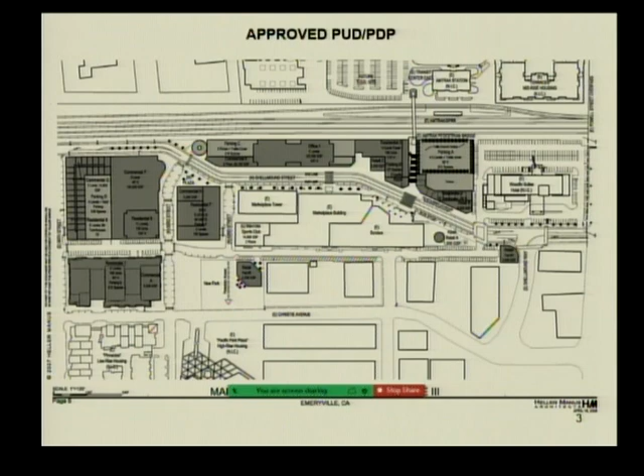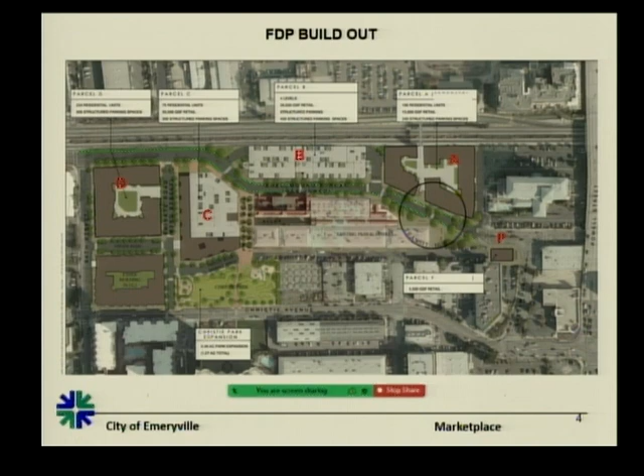Between 2015 and 2020, the Commission approved several FDPs, half of which have been built. Christie Park has been built, all the street work has been done. Parcel D, a residential building, has been built, as well as Parcel C, which consists of ground floor commercial and a wraparound of residential units.

The 3 parcels, A, B, and F, are the ones which are vacant. For A and B, there are existing entitlements. On parcel A, there's the entitlement for a residential building for 185 units, and on parcel B, there's an entitlement for office, lab, and parking that was approved in January 2020. No FDP approval yet occurs on parcel F, but that is being proposed at this time, as you will shortly see.

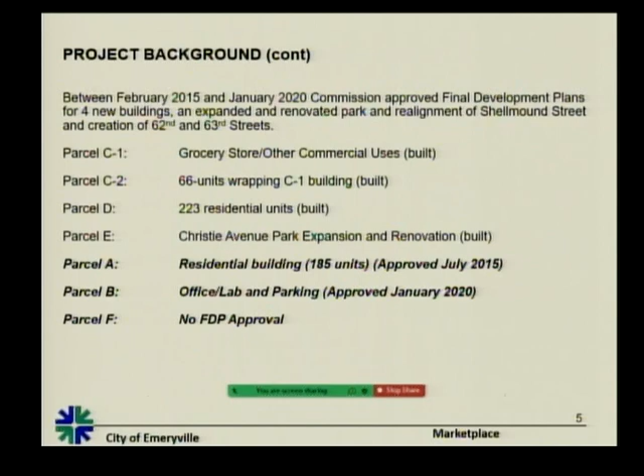In addition to the existing entitlements in parcels A and B, there is also a development agreement which the council approved back in December 2015, covering a variety of topics, including affordable housing. The section that pertains here is 7.1, which stipulates that parcel A include 18 affordable units. This section also states that unless the city finds compelling reasons to the contrary, the affordable units shall be dispersed throughout the development.

Here you see parcel A and B, as well as parcel F to your right. There are 3 buildings. The building to the north is the tallest, at 180 feet. The building in the middle is also R&D and is 60 feet. The parking structure is about 52 feet.

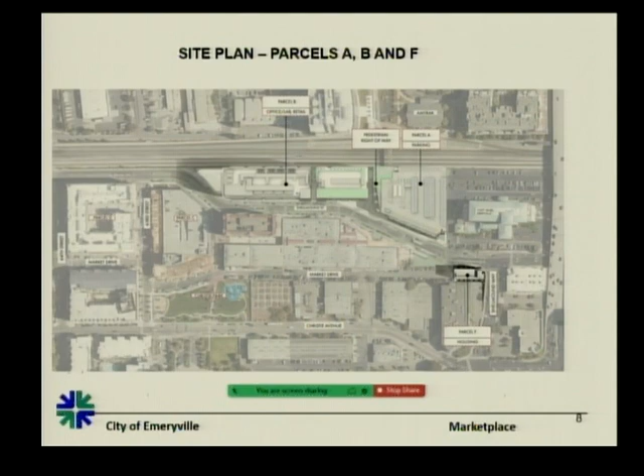This shows the ground floor of parcel A and B. On parcel B, you have 2 buildings. The ground floor on the middle building is retail, a little over 7,000 square feet. The ground floor on the taller building consists of conferencing amenities and back of house functions. Between the parking structure and the middle building is where the staircase connecting to the bridge comes down, with bike storage underneath the staircase, shown in more detail shortly.

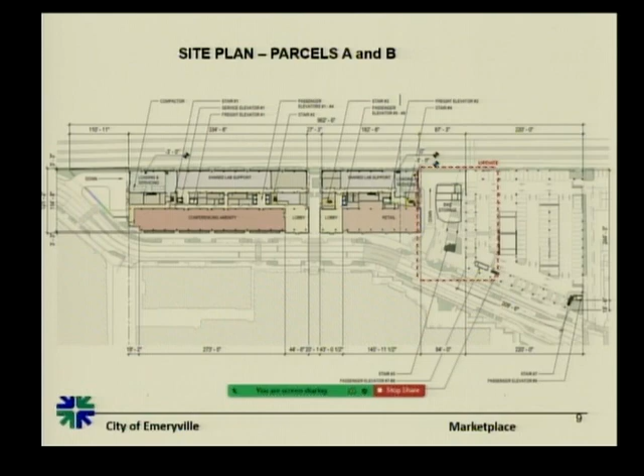The next 3 levels are basically floor plans for the R&D building and parking structure, changing on the 5th floor where the pedestrian connection occurs. At that level, the middle building's top level has a landscape roof and some mechanical equipment, and the parking structure has open air parking as well as solar panels.

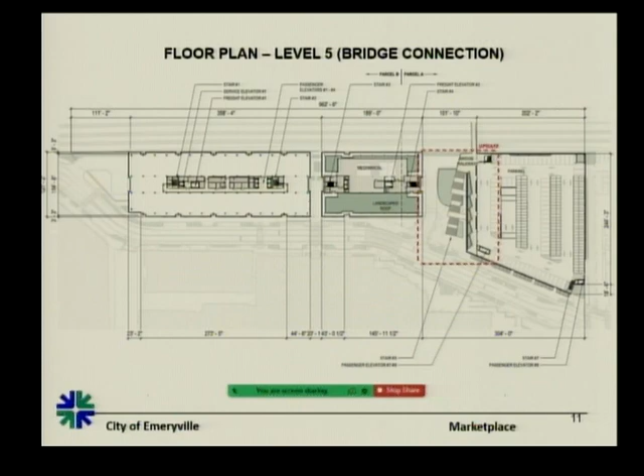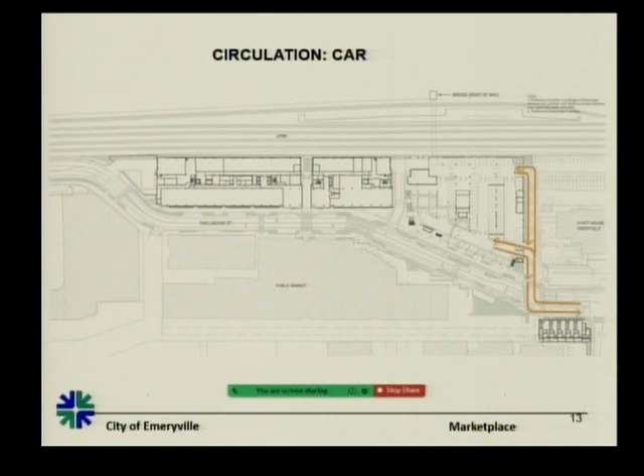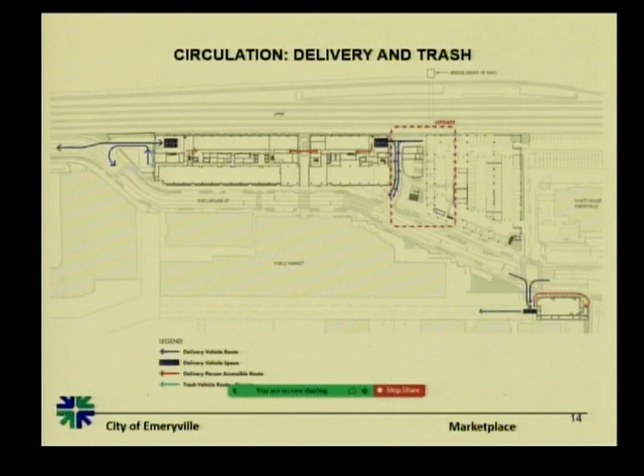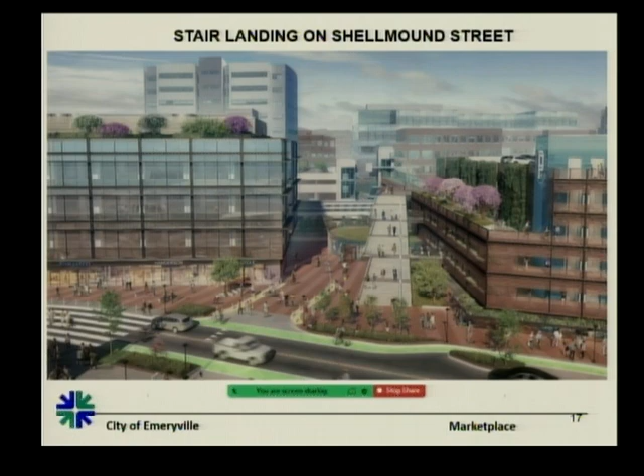And this is a view looking north. Next slide, please.

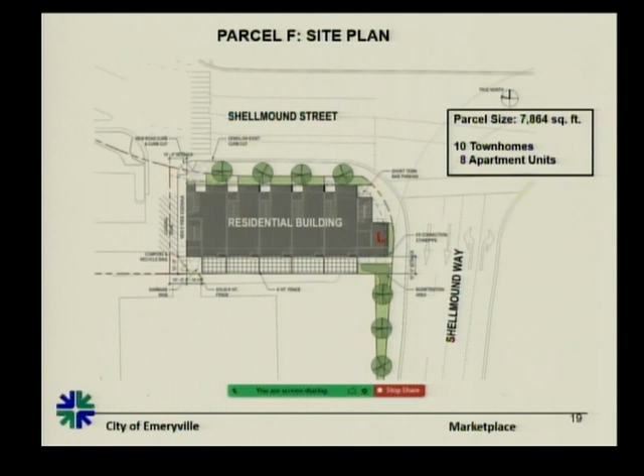On parcel F, this is a little under 8,000 square foot parcel. They are proposing 10 townhomes and 8 apartment units at the site.

Next slide, please. It reaches a height of 55 feet, and there are 4 levels of housing.

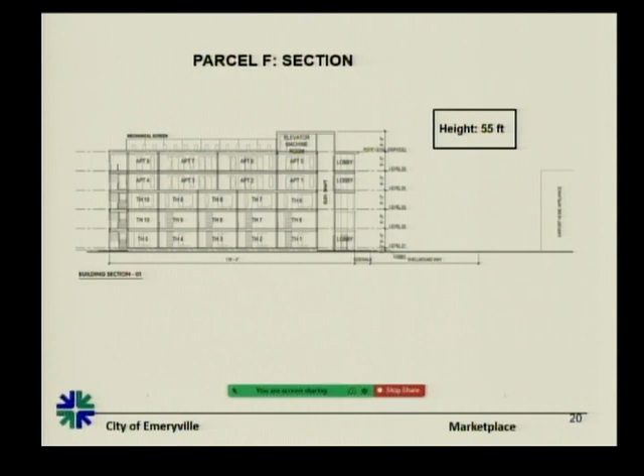Next slide, please. And these are the elevations, one showing the Shellmound Street elevation, and the other one the Shellmound Way elevation. Next slide, please.

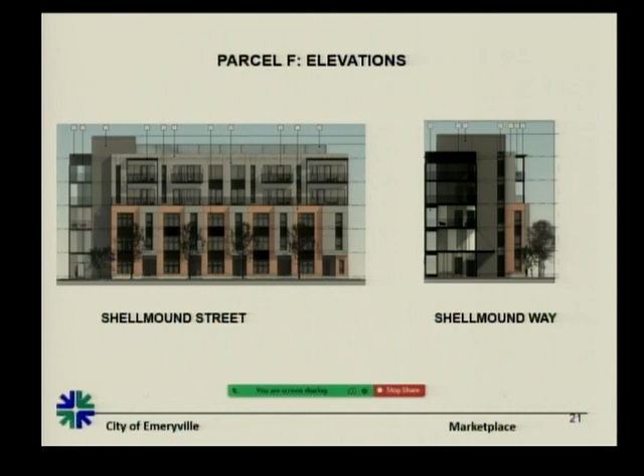In terms of conformity with general plan and consistency with the approved PUD PDP: in terms of use, the proposal does comply as the general plan designation is MUR, where residential, office, retail uses, and associated parking are permitted. The current proposal is consistent, and office and research lab uses are explicitly stated in the PUD conditions.

Next slide, please. There we also have the housing element of the general plan that includes a total of 674 units throughout the marketplace project in its residential site inventory, which is a tool for assessing the city's ability to meet its regional housing needs allocation, or RHNA as it's known popularly. This total includes 225 units on parcel A, whereas the approved FDP for parcel A includes 167 units. And this current proposal in front of you would reduce this number to 0. This is not considered an inconsistency with the general plan, since the site inventory is seen as a tool and is not regulatory.

Next slide, please. So these are 3 tables essentially showing the uses on parcels A, B, and F that were approved for the PUD, that were also approved by the FDPs, and the current proposal. So essentially what these tables are saying is that the current proposal includes more lab than the PUD and the FDP, less retail than the PUD and the approved FDP, and less housing than the PUD and the FDP. Next slide, please.

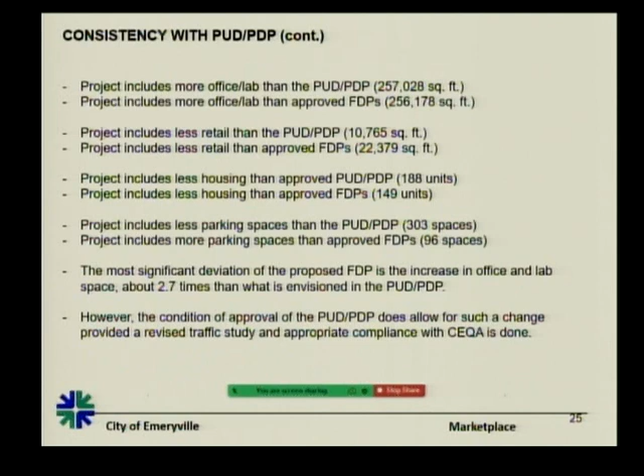So the most significant deviation of the proposed FDP is the increase in office and lab space to about 2.7 times than what was envisioned in the PUD PDP, and that comes at the expense of housing, which is reduced by 149 units. It should be noted, however, that the condition of approval of the PUD PDP does allow for such a change, provided a revised traffic study and appropriate compliance with CEQA is done. Next slide, please.

So staff reviewed this project in April and August. There were several comments made on the staircase, which have by now been addressed by the applicant. Staff questioned the viability of the proposed housing on parcel F from an urban design point of view. They also noted that the city's policies discourage providing all required affordable housing in one building. The building and fire departments also provided written comments which were attached to the staff report.

Next slide, please. This project was reviewed by the commission last week. The commission expressed concern regarding loss of housing on the site, and one commissioner stated that it was a missed opportunity. Another commissioner suggested partnering with the developer of 5850 Shellmound Street to add housing. At least 2 commissioners were not in favor of a standalone affordable housing building.

They noted that the design of the staircase had much improved, and a suggestion for adding seating at the stair landing was expressed. A need for a robust TDM plan was also expressed, but the Commission generally liked the architecture and appreciated the inclusion of green roofs and solar panels.

Next slide, please. The BPAC reviewed this project yesterday. The committee liked the grand staircase and also suggested activating the stair landing space by adding chairs and tables. Concerns were expressed about potential conflicts between pedestrians and bikes with the proposed delivery access between the Life Science building and the garage. It was suggested restricting delivery hours as one possible mitigation to address this conflict.

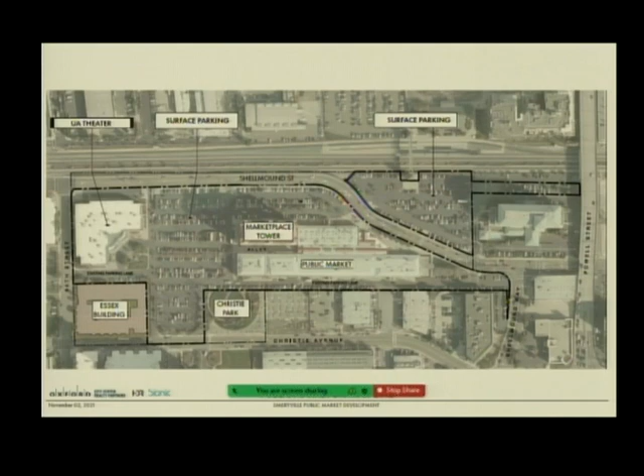Next slide, please. Over the last 9 years, CCRP has worked closely with the city to bring this vision into place. Next slide, please. And that's the old vision. Next slide.

We have demolished Shellmound Street and constructed a new Shellmound Street 120 feet to the west with landscaping and bike lanes, as well as a merry-go-round and AC Transit bus shelter. This work has transformed Shellmound into a two-sided urban street, which is safer for bikes and pedestrians alike, at a cost of over $23 million.

Next slide, please. We have transformed a UA movie theater and a parking lot into 223 multifamily units on parcel D and 66 units on parcel C, of which 32 are affordable.

The public market is, next slide please, the public market is constructed and delivered in total 479 units, more than any other project in Emeryville, and approximately 40% of the total units constructed, under construction, and approved over the last 10 years. Please note that we have spread affordable housing throughout the projects in parcel D, C, and in F.

Next slide, please. We have completely reconstructed and activated the food hall with 16 new vendors and more on the way this fall. These new vendors offer a variety of unique and high quality foods. This includes an ongoing partnership with the nonprofit La Cocina, for which we've provided an ongoing pop-up space for women of color and immigrants in low-income communities to affordably incubate their businesses. This partnership has resulted in award-winning eateries such as Nyum Bai Cambodian, Minnie Bell's Soul Movement, and Mama Lamees.

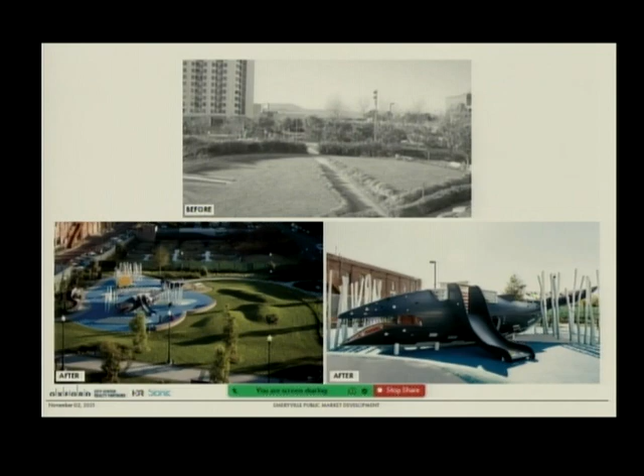Next slide, please. The final pieces to complete the public market district are parcels A, B, and F.

As Miru stated in her presentation, CCRP obtained entitlements for a life science project for parcel B and a residential project for parcel A several years ago.

We hoped the residential could be built. Unfortunately, due to economic conditions, our partner at the time, Avalon Bay, would not proceed with the construction of multifamily on parcel A. Avalon has built and leased multifamily housing on parcels D and C and projects throughout the Bay Area. Avalon was acutely aware of the costs and revenues to be derived from building new residential product on parcel A and would not build at an economic loss.

While CCRP hoped for residential, we also could not construct multifamily at a loss given the $28 million of benefits we've already contributed to the public market district.

There has been much discussion about RHNA requirements. In a perfect world, I'm sure the city would like us to build the approved residential plan for parcel A. We understand the housing need, but we can't lose more money on this project. And we feel that we've already made a sizable contribution to the housing needs at the public market with 479 units. If the city determines that housing is the only use that would be appropriate for parcel A, we would most likely build the approved FDP for parcel B and leave parcel A as it currently stands.

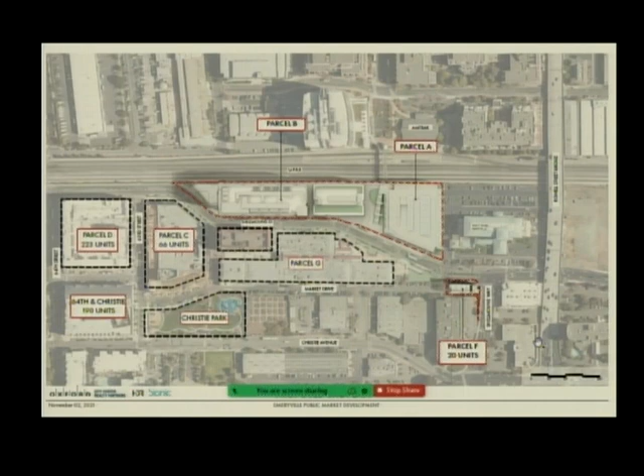Next, please. I'd like to briefly compare this to prior approvals for the preliminary development plan and the final development plan, which is below in blue. The massing has been intentionally distributed along the sites to fall within the approved height limits, with specific hierarchy of importance and priority placed on the open space for the pedestrian access from the east side of the tracks and the bridge. This offers view corridors to the bay and enhances the pedestrian experience.

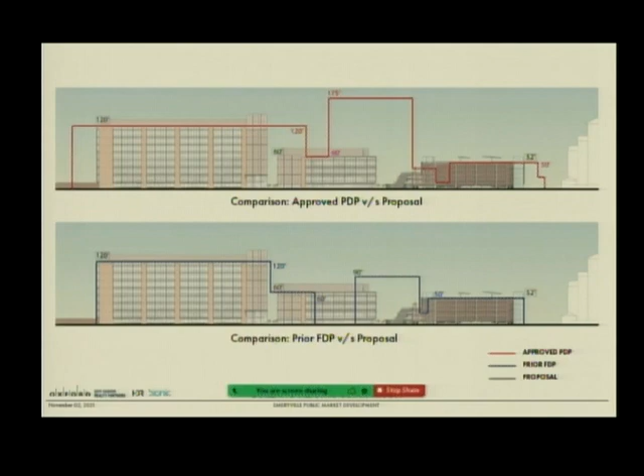Next, please. Equally important is the connection to the open space network. The proposed final phase of this development includes open space which is greater in area than that defined in the PDP. The improvements made here to the infrastructure and the public plaza, in the area where the pedestrian experience is, capitalizes on the investment made by CCRP and the city in the previous construction.

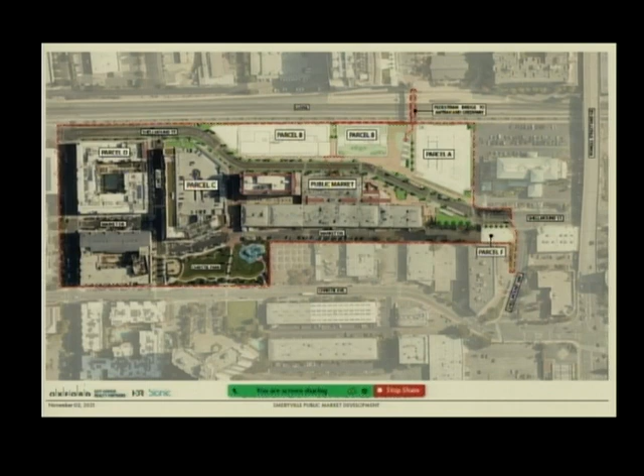Next, please. There's a public plaza being developed at the base of the stairs. It's a major draw and collection point for arrivals and departures to the public market. This is a transit-oriented district. It is here at this location that commuting on foot, by bike, by bus, and by rail, including vehicular access to the parking structure with the elevators right there in that blue element, all come down to this public plaza on Shellmound Street. The stair descends right through the view corridor. It's open, gracious, inviting, and can house multiple functions and activities throughout the seasons during the year.

The development really has no backside. The east view has the same vertical expression of bay windows that face the east and similar articulation on the podium. The lower massing of the parking structure receives the pedestrian route from the bridge, which comes over the tracks into the public market district.

If we focus on that area itself, it's another collection point. You can see intercommunicating stairs to the garage, and it's at that point pedestrians and those on bikes choose how they descend into the entry of the public market district. It's well populated, well lit, with visual surveillance from the bridge, Shellmound Street, and the neighboring properties around.

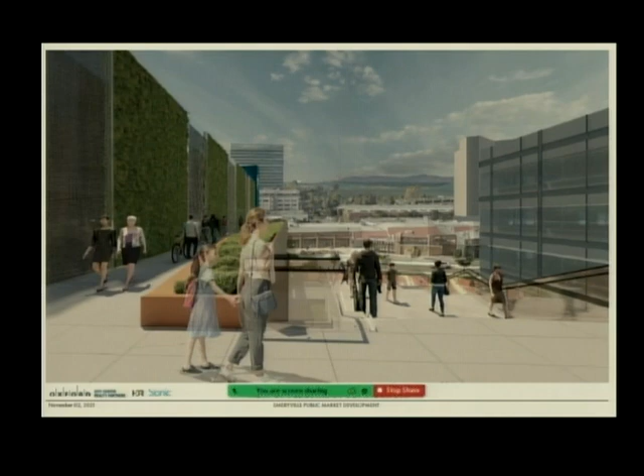At the top landing, you can go down the stair with your bike in a bike rail if you wish, or choose the ADA route on the left, which takes you directly to the elevators at the end of that walkway down onto the public plaza fronting the street.

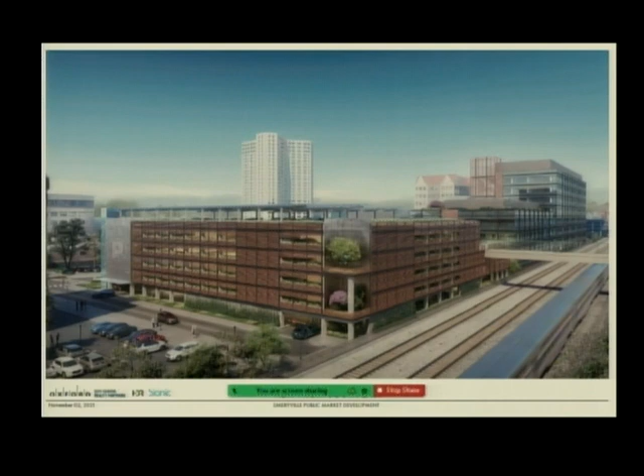The parking structure is articulated with similar industrial scaled character, incorporating landscaping on the facades facing the south and the east to soften and add visual interest to the development. There are photovoltaic arrays on the roof, providing a renewable energy source and shade for the automobiles up there.

This is an elevation of what was submitted in our first submission for the 18 units. It's a work in progress, not the final, but the design will be consistent with parcels C and D, the character therein.

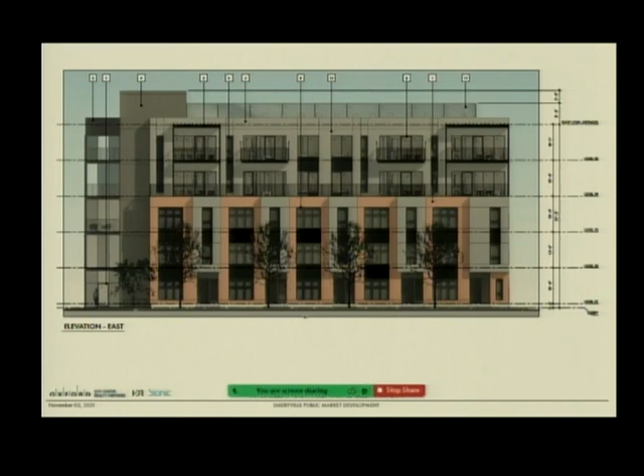Initially we submitted 18 units, and since we've investigated opportunities to increase the number of units to 20. To tag on to what Ofer and Marcus said regarding the residents on this parcel F, we believe this can be a unique residential community. It affords light and view on all four sides of the building, and inevitably a better quality environment for the residents therein. There are 20 units, all affordable.

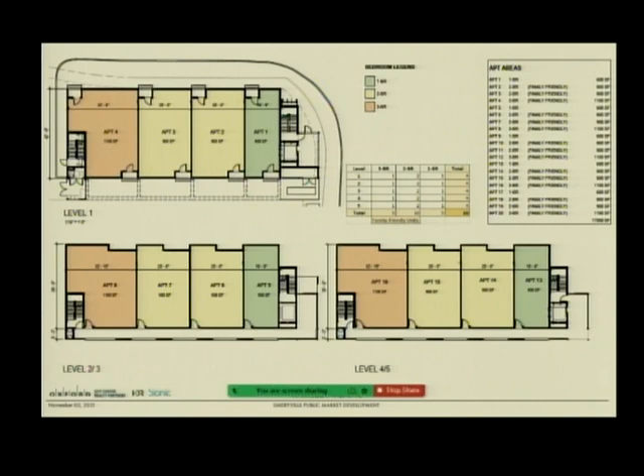5 one-bedroom, 10 two-bedroom, and 5 three-bedroom units, with 15 total units family friendly. The lower level, the upper row on the left, has access entry from Shellmound Street, and the upper levels 2 through 5 enter the building on the left with an elevator lobby bringing you up to a corridor on the west side of the building.

I'd now like to introduce you to Dorka Keene with Keene on Art. Good evening, City Council members and members of the public. It's a pleasure to be here to provide a brief overview of the market's public art program.

As you may know, the city requires a public art master plan for development projects. We developed an initial plan that was reviewed and approved by the city's Public Art Committee and General Manager in July 2020. As the life science building and parking structure have gone through significant changes, we will be returning to the Public Art Committee to review new locations, types of art, and the pool of potential artists. The goals and curatorial vision you see here are all from the initial plan and will not change. They reflect the vision of the developers as well as the city's art master plan and the Shellmound District Art Plan.

On the left is a rendering of the artwork that will go in Christie Park by local artist Sophie Ramos, which I think is a wonderful articulation of these goals.

The total public art budget is approximately $4 million. The previously approved locations noted in blue are Christie Park, the Public Market Courtyard, and the Stairwell Plaza. The new locations noted in red are on the north side of the Life Science building and the south side of the parking structure.

These will serve to welcome those who will work, live, and visit the Public Market District. I'm now going to hand it over to Sarah Moss Thompson from Bionic, who will be discussing the landscaping of the project.

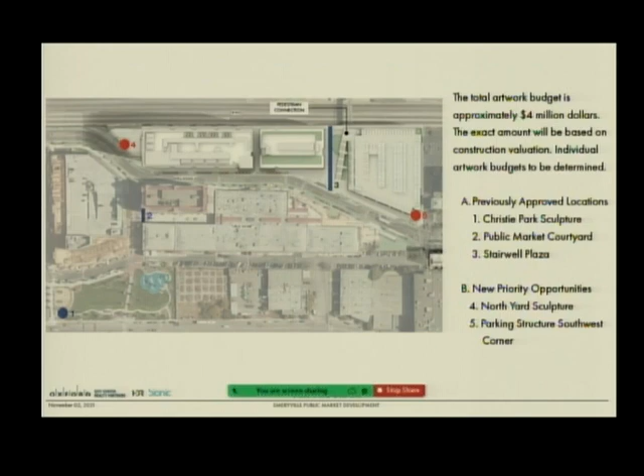Thank you, Dorka. My name is Sarah Moss Thompson with Bionic, and we are the project's landscape architect. For this tight urban site, our team is using urban landscape solutions to transform the existing vast parking lot, narrow sidewalks, and uninviting pedestrian bridge into a vibrant, activated, and connected public realm.

We understand from your general plan that this is a pedestrian priority district at the city core. Based on this, the team's landscape priority is to create comfortable spaces for people, bicycles, plants, and pollinators that are active and safe day, night, and year round.

The public realm will bring new, inviting, publicly accessible plazas for tenants, employees, community members, and visitors. The spaces will offer a variety of public amenities and flexible seating for a range of programming and use, as well as garden-like spaces with native and adapted plants integrated into the streetscape and building facades for intrigue and to soften urban edges.

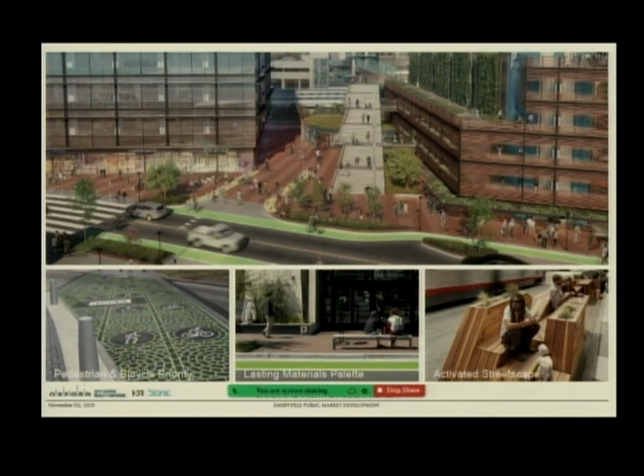We also understand from your general plan that this site is a critical node to connect Emeryville together. The proposed plazas, wide sidewalks, open-air stairs and bike rails, designated bicycle lanes and bike racks, and bus stop are strategically located to be a multimodal transit hub with a highly visible connection across the bridge to Amtrak and the Emeryville Greenway to the east, a direct connection to Christie Park to the west, and an expansion to the extensive Emeryville open space and bicycle networks.

The streetscape improvements are designed to prioritize pedestrians and bicycles, including safe crossings along the entire corridor. The design expands upon the existing durable materials palette and includes a new set of streetscape furnishings to create interactive public spaces, to complement the building architecture, and to tie this entire district together as one connected, attractive, and iconic addition to the city.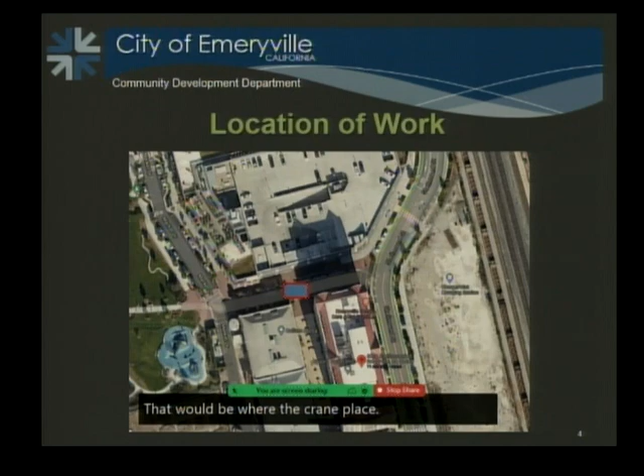Next slide, please. So this is sort of the location of the work. The crane placement is the box in blue, which will be on 62nd Street between Market Drive and Shellmound Street. That would be where the crane will place itself. Next slide, please. And this is a graphic of where the crane will be and how the work would occur. There are some details along the crane if anyone is interested.

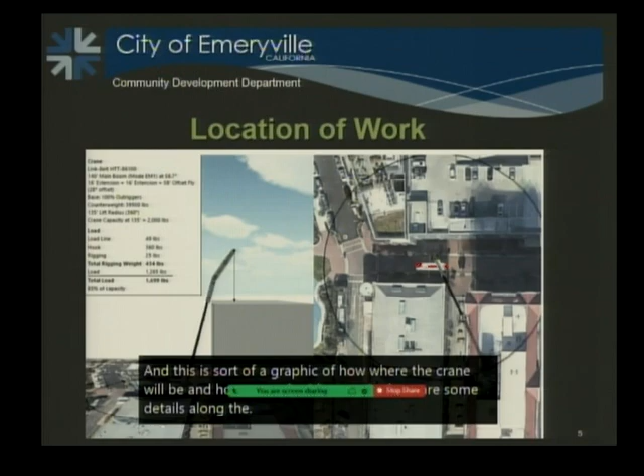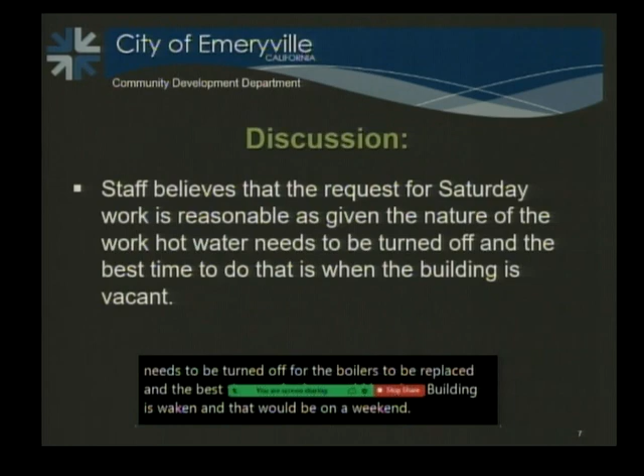Next slide, please. Staff believes that the request for the Saturday work is reasonable, as given the nature of the work, hot water needs to be turned off for the boilers to be replaced, and the best time to do that would be when the building is vacant, on a weekend, hence the request for Saturday work. Next slide. That concludes my presentation, and we are recommending approval subject to the conditions of approval. The applicant is present if you have any questions for him.

Colleagues, are there any clarifying questions at this time? Okay, seeing none, I will go ahead and open the public hearing at 7:43.

Now is the time for public comment. If you're joining us via Zoom, you can use the raise hand feature visible on your screen, or if you're calling in, you may press star 9. At this time, I will ask if the city clerk has received any electronic comments or speaker cards. No electronic speaker cards. I am just giving a second for anyone who wishes to speak to go ahead and raise their hand. Seeing no hands raised, I'm going to close public comment, close the public hearing at 7:44 p.m.

I'll bring this back to my colleagues for deliberation, or if there's none, I would be happy to entertain a motion. I move approval of this. Second the motion. All right, we have a motion by Member Donahue and a second by Member Bauters on the resolution. Please call the roll.

Councilmember Bauters? Aye. Councilmember Medina? Aye. Vice Mayor Donahue? Aye. And Mayor Martinez.